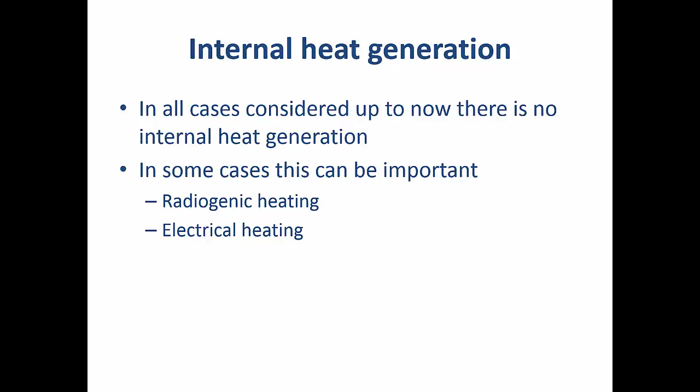So I'm actually going to do this in the context of radiogenic heating, in that I'm going to look at a specific example of the vitrification of high-level nuclear waste, which relates to the area that I research in. Now, high-level nuclear waste arises from the reprocessing of spent nuclear fuel to extract the reusable uranium and ingrown plutonium.

Reprocessing results in a highly active liquid waste, and that is then immobilized, or can be immobilized, by vitrifying it, i.e. turning it into a glass. This glass is cast into stainless steel cylinders and is currently stored in specialist above ground stores where they are cooled by natural convection.

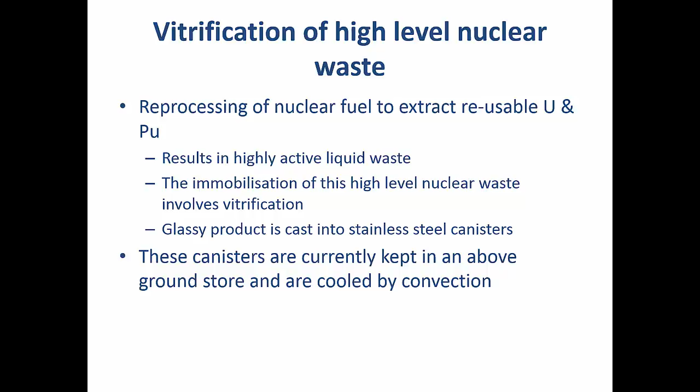Because the radioactivity in those cylinders means that the temperature can be several hundred degrees centigrade within the cylinder due to the radiogenic decay. Specifically, the temperature will be high for the first 300 years due to this internal radiogenic heating, because there are two particular beta emitters, namely cesium-137 and strontium-90, both of which have half-lives of approximately 30

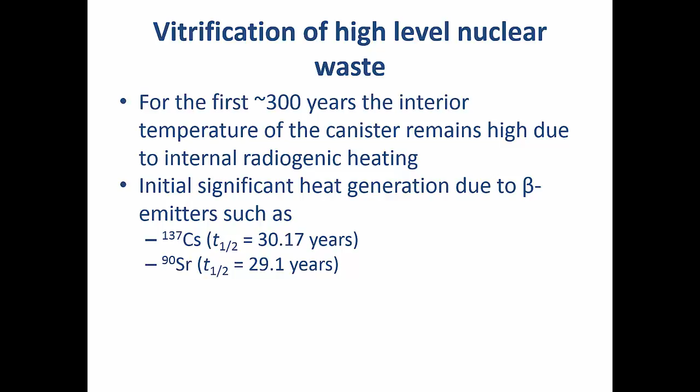years, and essentially it takes 10 half-lives to get things to a level where you no longer need to consider them to the same extent, and certainly in terms of their impact on temperature. After 300 years, they will have relatively small impact on the temperature of the system.

So, what's the specific problem we're looking at? Well, we have a cylinder of glass that has a radius of 0.215 meters if we're looking at what's done in the UK. The glass will have a thermal conductivity of the order of 1.09 watts per meter per Kelvin, and I've given a particular value of the heat generation per unit volume of 16.7 kilowatts per meter cubed.

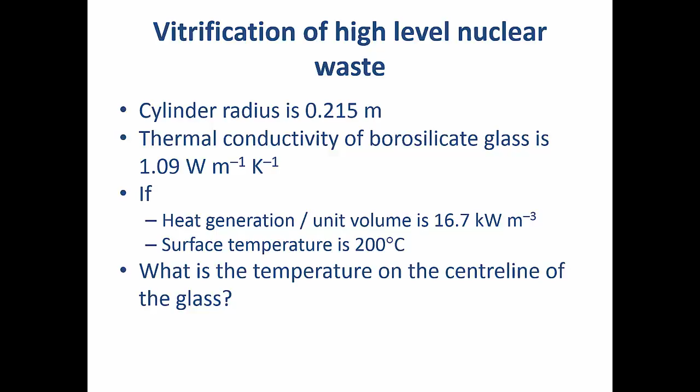And if the surface temperature of the glass is 200 centigrade, what would then be the temperature on the center line of the glass? Well, to tackle this problem, we're going to assume that the radionuclides are uniformly distributed within the glass. That means we can assume that the heat generation, Q dot, has a constant value throughout the volume of the glass.

We're also, because we're dealing with a cylinder, going to use cylindrical polar coordinates, and for simplicity I'm going to assume that the cylinder is very long, so that the temperature distribution can be taken as depending on the radius only. I'm also, and this may seem a little bit odd, going to assume that the temperature distribution does not vary with time. Strictly it does vary with time.

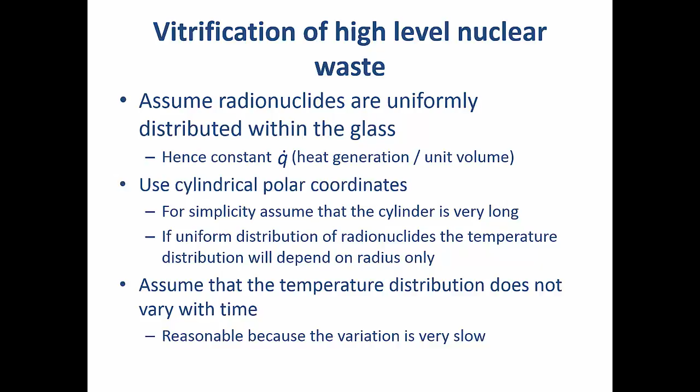We know after 300 years it will not be the same as it is now, but because that time variation is slow, it's reasonable to ignore any change with time in the calculations that I'm going to do. Now, so far we've met the one-dimensional heat conduction equation in its full version in Cartesian coordinates. I've shown it here just by way of reminder.

The left-hand term relates to changes in the stored energy in the system. Q dot is the energy generated per unit volume, and then this is looking at the variation of temperature with position. If we transform to cylindrical polars, then we get an equation that looks similar but not identical.

Again, the left hand side relates to the energy stored in the system. The Q dot is the energy generated per unit volume, and the differential term now has the form 1 over r ∂/∂r of k r ∂T/∂r.

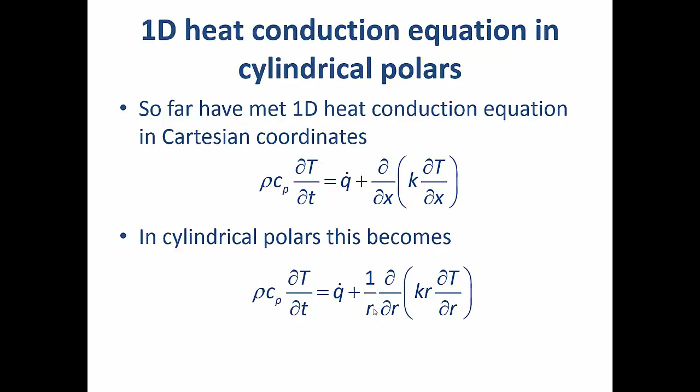Now, as I've said, I'm going to treat this as a steady state problem. The dT/dt term will be 0, and the partial differentials with respect to r become complete differentials, so I can rewrite this equation as 1 over r d/dr (r dT/dr) equals minus q dot over k. I've also implicitly assumed here that k is not a function of position or temperature.

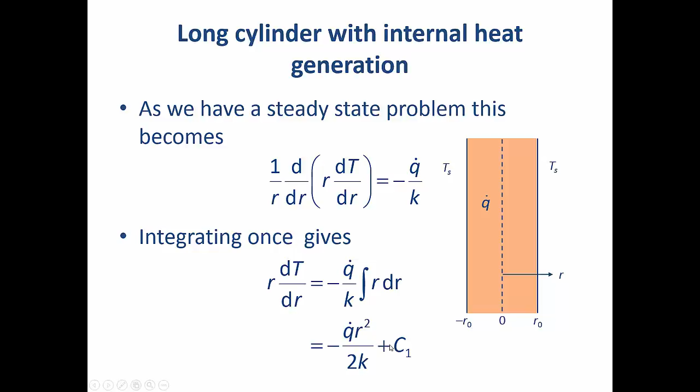This equation I can integrate once straightforwardly, which will give me r dT/dr on the left hand side equals minus q dot over k times the integral of r dr on the right hand side, giving me overall minus q dot r squared over 2k plus some constant of integration on the right hand side.

If I rearrange that equation and then integrate once again, I'll go through the following process. I'll first of all get dT/dr equals minus q dot r over 2k plus c1 over r. Now I do my integration with respect to temperature on the left hand side, with respect to radius on the right hand side. Left hand side just integrates to T. The right hand side will give me minus q dot r squared over 4k plus c1 log of r plus c2, where both c1 and c2 are constants of integration.

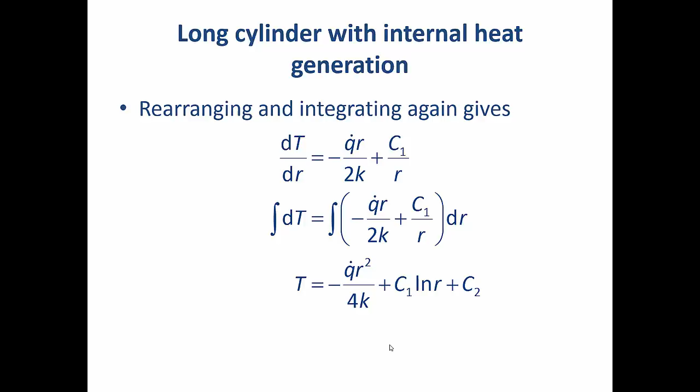Now, in this particular case, I have a cylinder. We would expect everything to be symmetric, and obviously also a solid cylinder has a value of r that equals 0. Log of 0 is a problematic function, and to avoid problems at r equals 0, we would therefore say that the constant c1 must be equal to 0.

And the other thing I'm going to say is that at r equals r0, where this is the outer radius of the cylinder, T equals Ts, the surface temperature, and on that basis I can evaluate my second constant of integration to be equal to Ts plus Q dot times R0 squared divided by 4K.

Putting this all together, the temperature in the cylinder equals the surface temperature plus Q dot over 4K, R0 squared minus R squared, or this is more commonly written in this form here, where that second term is expressed as Q dot R0 squared over 4K times 1 minus R squared over R0 squared. And that temperature distribution is obviously parabolic in form, as shown in the adjacent graph.

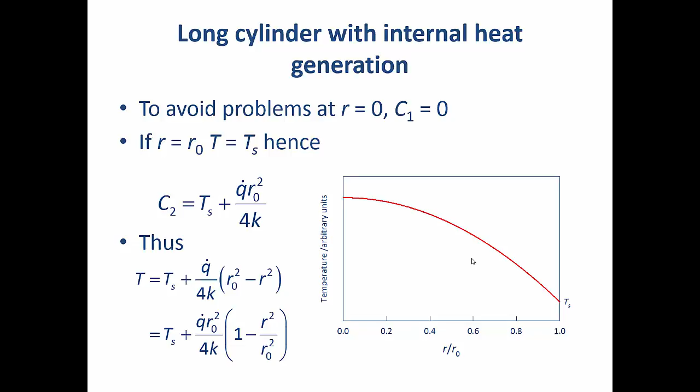We can also rewrite this temperature distribution in a normalized form, whereby I can simply say that temperature at any point in the cylinder minus the surface temperature divided by the center temperature minus the surface temperature is equal to 1 minus R over R0 all squared.

It's also, of course, possible to work out the heat flux by simply using the standard Fourier's law, again in cylindrical polar form, and applying that to the overall temperature distribution gives me that the heat flux is Q dot times R divided by 2.

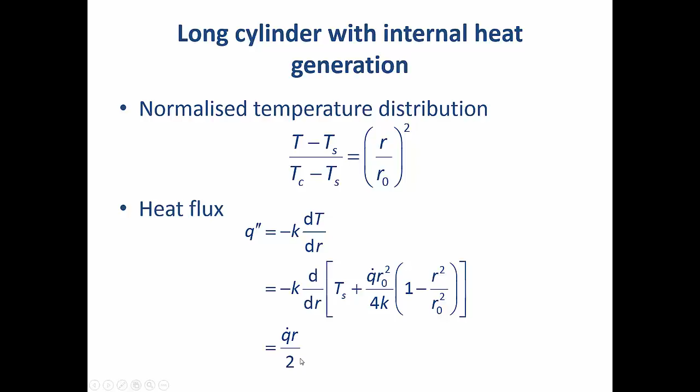Going back to the actual temperature distribution, I originally asked what is the surface temperature based on the values that I've given, the heat generation per unit volume, the size of the cylinder, etc. That would mean that my center line temperature was 377 degrees centigrade.

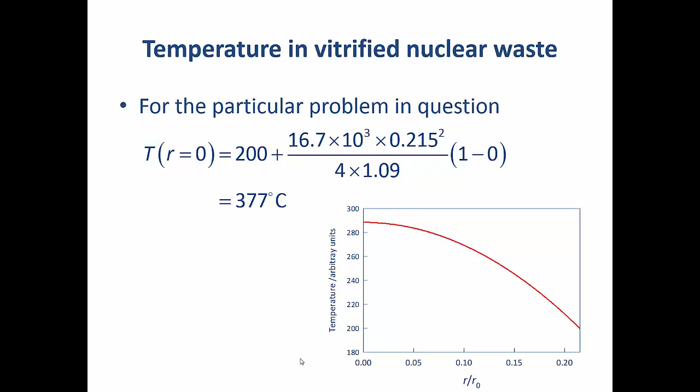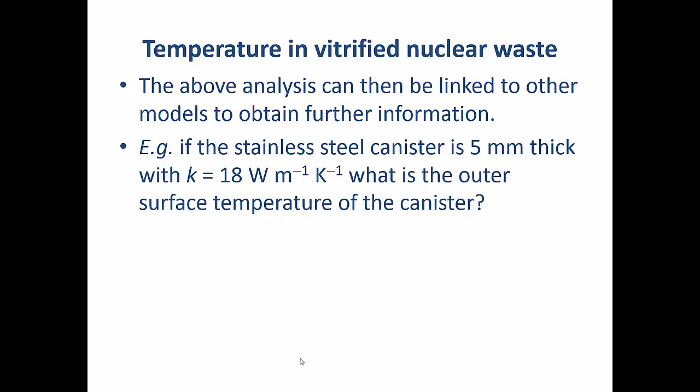Now, it is actually then possible to link this model with other models to obtain further information. So, for example, if I wanted to know the temperature of the stainless steel canister, or more exactly the outer surface temperature of the stainless steel canister around the glass, we know how much heat is being generated per unit volume, hence we can calculate the heat flow out of the glass, as shown here, which gives me 2.425 times 10 to the 3 watts per meter.

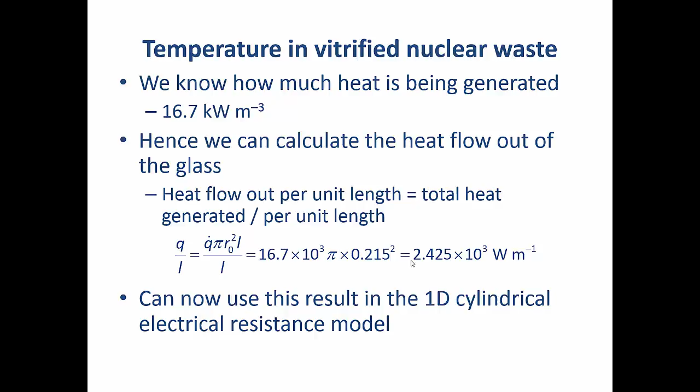And if I plug that into the one-dimensional cylindrical resistance model applied only to the stainless steel cylinder, then I can work out what the temperature drop across the cylinder is, assuming that the inside surface of the cylinder is at the same temperature as the glass, which implies that there is good thermal contact. That's probably reasonable because the cylinder is likely to shrink onto the glass.

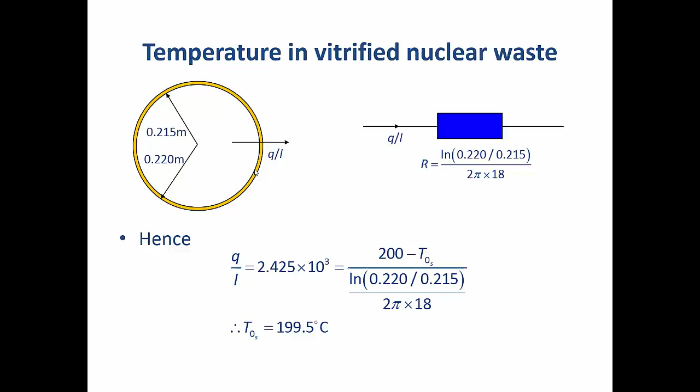You can see in this case that there is a very small temperature drop, which is not surprising, thermal conductivity of metals being much higher than that of the glass and the cylinder only being thin.

But by combining those two models, I can now get a description of the temperature in my vitrified nuclear waste and the stainless steel canister, granted that I've made some simplifying assumptions, such as the fact that the cylinder is effectively extremely long. This is not true in practice, and you would expect some variation from the top to the bottom of the cylinder as a result. Also, the casting is unlikely to be absolutely perfect, which would further complicate the detailed temperature distribution.

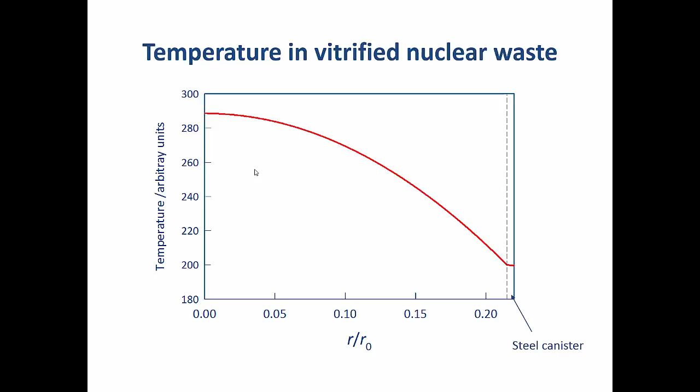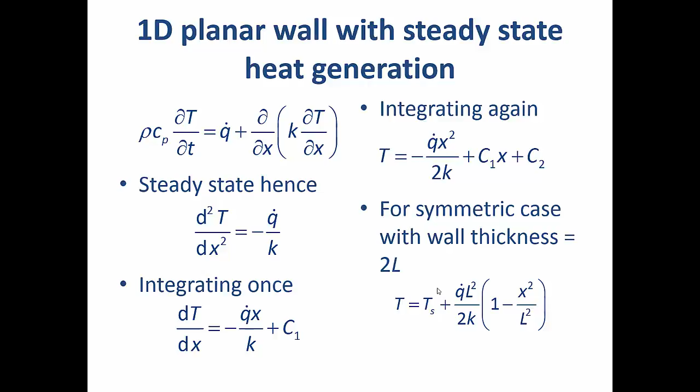If the system is symmetric and has a total wall thickness of 2L with a surface wall temperature of Ts, then this will be the temperature that you get from that distribution when you work out the values of C1 and C2. Of course, it does not have to be symmetric, in which case you would get different results for the values of C1 and C2, and thus for the detailed temperature distribution.

So to summarize what I've covered here, having initially gone through the solution to the problem I left you with last time related to the casting of cast iron in a sand mold, I've then gone through how we can incorporate heat generation into steady state problems, specifically in the context of vitrified high level nuclear waste canisters, and then briefly just shown you how you get the similar equations for the one-dimensional planar case.